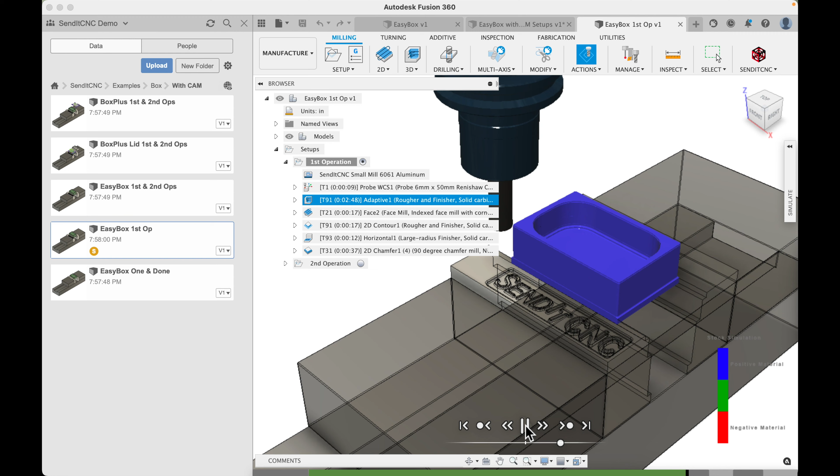Welcome everybody. In this video, we'll take a quick look at how to get started with the SendItCNC add-in for Fusion 360. The SendItCNC add-in is intended to make the power of CNC machining accessible to all Fusion 360 users, including those of you who do not have your own CNC machine.

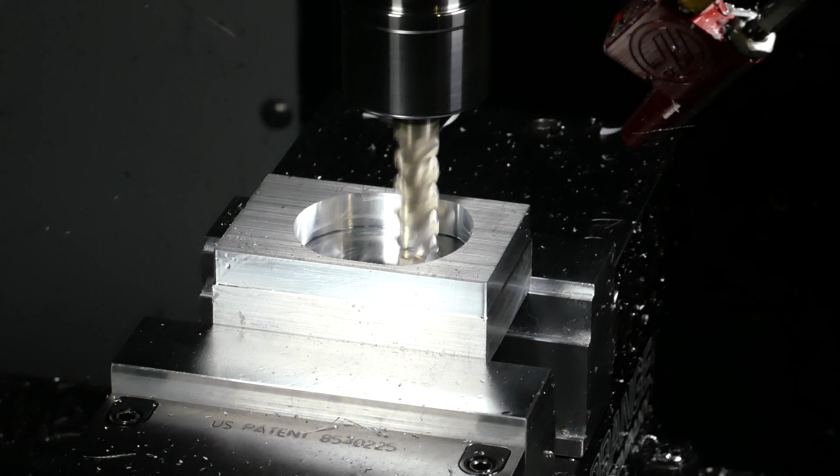Today, we'll run through starting the add-in and getting the necessary CAM setup files. Then, we'll show how to quickly take a design, make a CAM setup for it, and get it made on a cloud CNC machine. First, you'll need to get the SendItCNC add-in if you don't already have it.

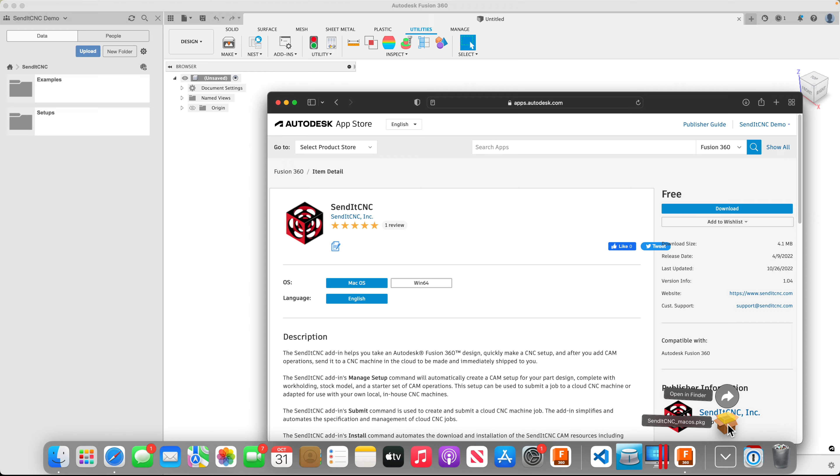To get the add-in, select Utilities on the toolbar, then click the drop-down on the add-ins item and select Fusion 360 App Store. Select the SendItCNC add-in and download it. Then run the installer. The add-in will start automatically when you restart Fusion 360, but right now we can run the add-in from the Scripts and Add-ins dialog.

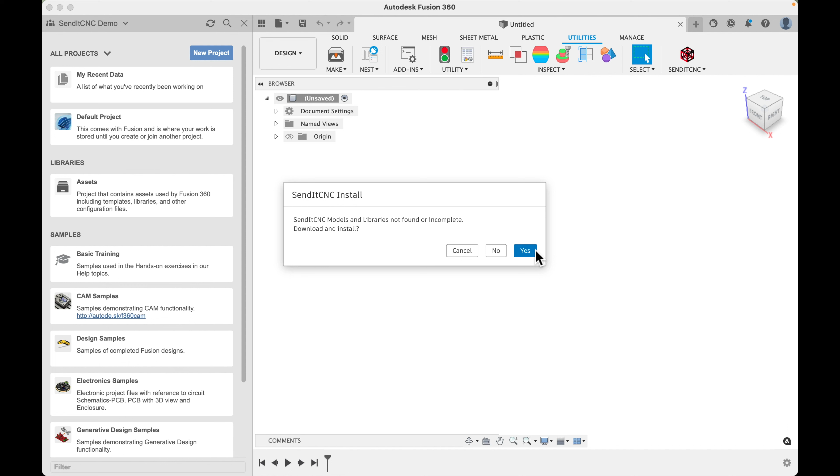The SendItCNC add-in will appear at the end of the Utilities toolbar. Just click on the SendItCNC add-in icon. If this is your first time, you'll see a message saying that the necessary resources need to be installed. Just follow the prompts. A new project called SendItCNC will be created containing the required design files. This takes a few minutes.

As well, other required resources like tool libraries and CAM templates will be uploaded. You'll also be prompted to load the CAM defaults file that the add-in has placed in your Downloads folder. Okay, we have the add-in started and the resource files installed. So here's how to take a Fusion 360 design, create a CAM setup for it, and cut it from a raw block of aluminum using a CNC machine in the cloud.

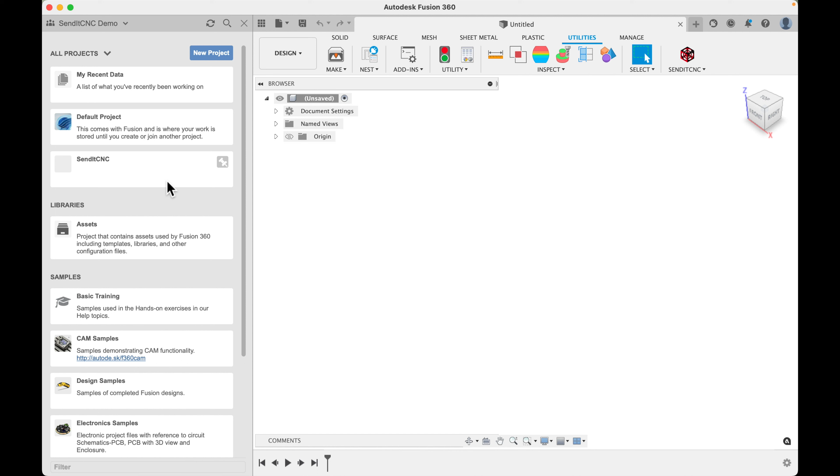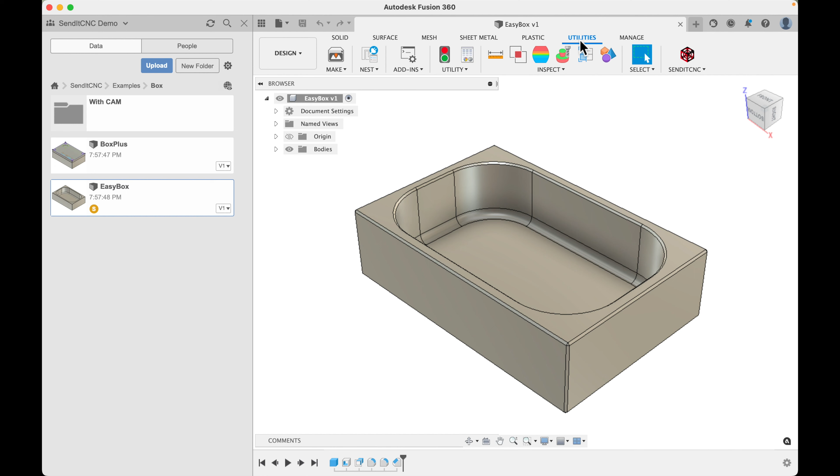First, open the design containing the part you want to make. We'll use the design for a small box found in the SendItCNC project in the examples/box directory, and it's called EasyBox. Now we'll create a CAM setup so we can machine our part. On the Utilities toolbar, click on the SendItCNC add-in icon. This time, the libraries are found, so the Manage Setup command window will appear.

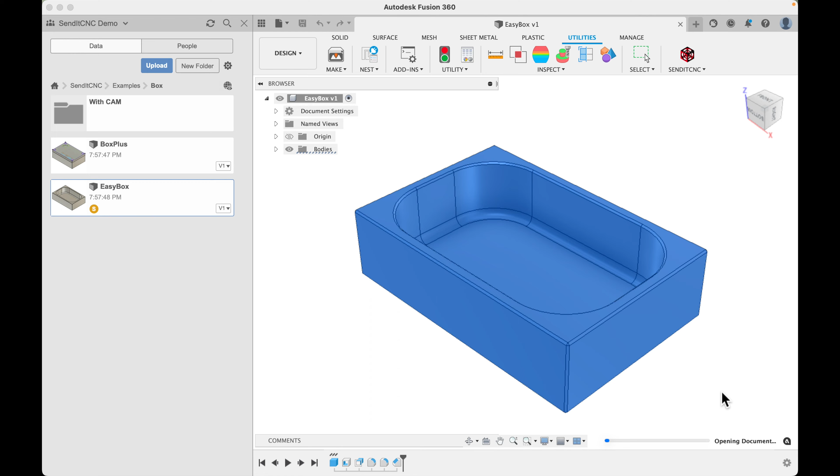All that's required is to select the model, the box in this case, and then click Create Setup. You'll see the add-in open a CAM setup, resize the stock, and import your design. This takes a few seconds to complete. The default CAM setup is for 3-axis milling with the workpiece held in a vise. There are a lot of options, vise jaws, stock allowances, and so on, but the defaults will be a good starting point. Just click OK and you're done.

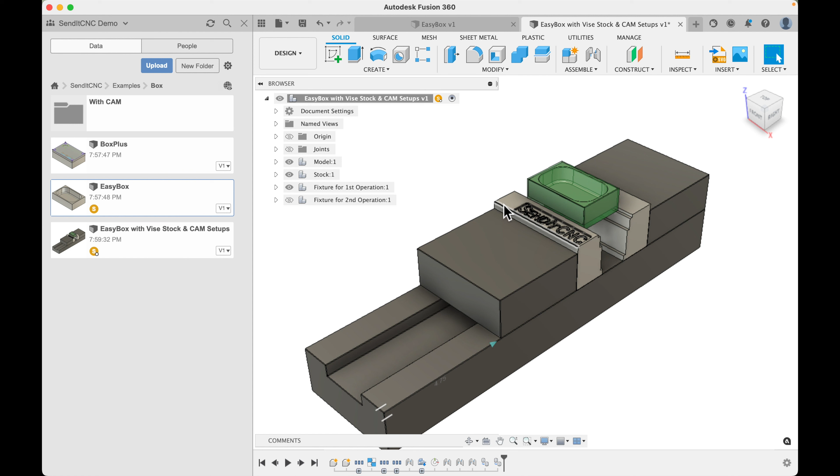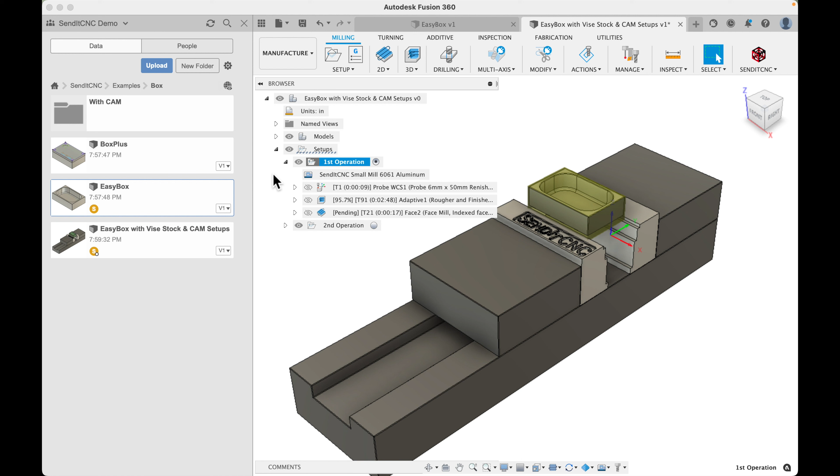You've created a CAM setup complete with a work holding model and a model representing the raw stock material, and it was actually that easy. Now, let's switch over to the Manufacture workspace where the CNC machining operations are specified. If you expand the first operation setup item, you'll see that 3 CAM operations are already provided. We'll do a generate to compile them for this model, and the generate command is found in the Actions toolbar item or by just right-mousing on the first operation setup.

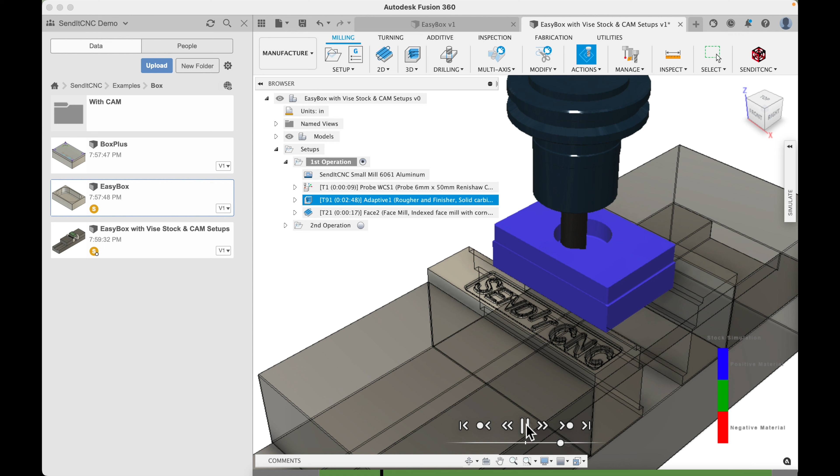Now, let's simulate. We'll see an animation of the CAM operations as they would be executed on a CNC machine. The provided operations are, first, a probing operation to let the CNC machine precisely locate the workpiece, then a roughing operation to cut the workpiece to the approximate size of the part, and third, a facing operation to finish the top surface of the part.

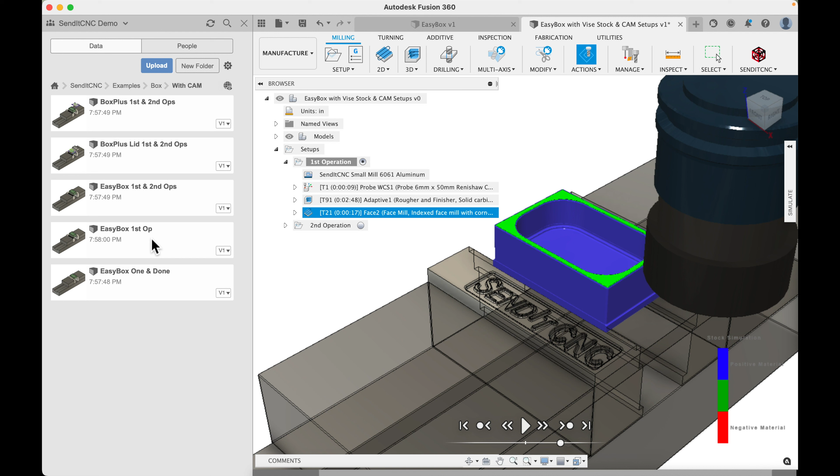Of course, you'll want to add additional CAM operations here to completely machine and finish your part. It's typical to have numerous iterations of adding and tweaking CAM operations and then simulating to get ready to make the part on an actual machine. The EasyBox example with the complete CAM for the first operation is in the SendItCNC project in the examples/box/with-CAM directory, and it's called EasyBox First Op.

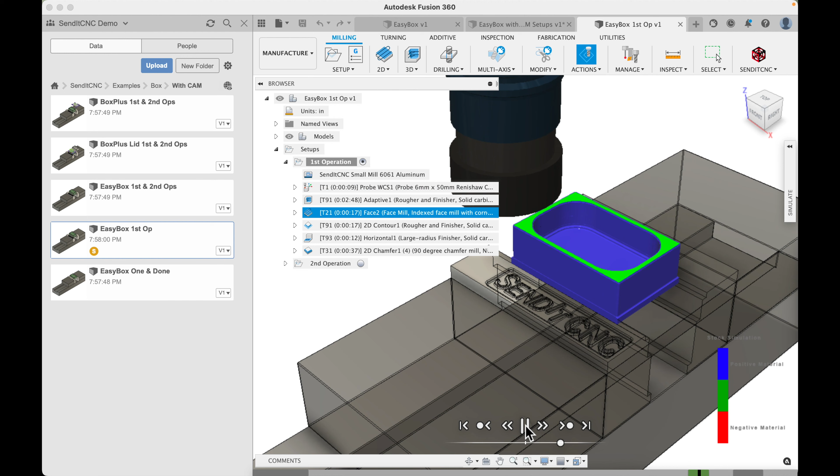If you have a look, you'll see that several more CAM operations were added to finish the part. We can simulate and just fast forward to the end of the CAM. You see the top surfaces of the box are shown in green, which indicates that they've been machined to the shape of the design. So, now to actually send this design to a cloud CNC machine to get it made, click the SendItCNC icon while you're still in the Manufacture workspace.

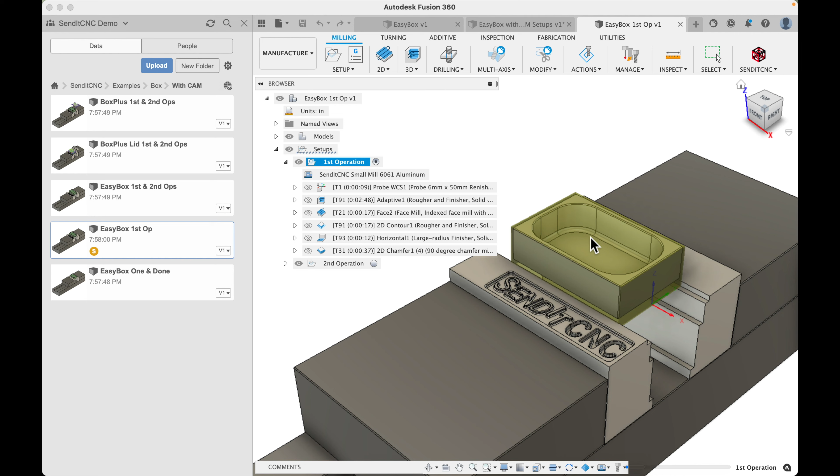The SendItCNC Submit command will export the design as an F3D file to your Downloads folder and take you to the SendItCNC website to get the part cut on a cloud CNC milling machine. After you create a user ID on the SendItCNC website, you'll be able to go through the job submission process. You'll see details of the machining job, including the material size, the setup details, estimated machining time. You'll have to add a description of your part and select the exported F3D file from your downloads directory.

Once you're done, you'll see an instant quote and available machining time slots. Proceed through the checkout, your job will be validated, then your part will be machined and immediately shipped to you. And that's how the SendItCNC add-in for Fusion 360 works.